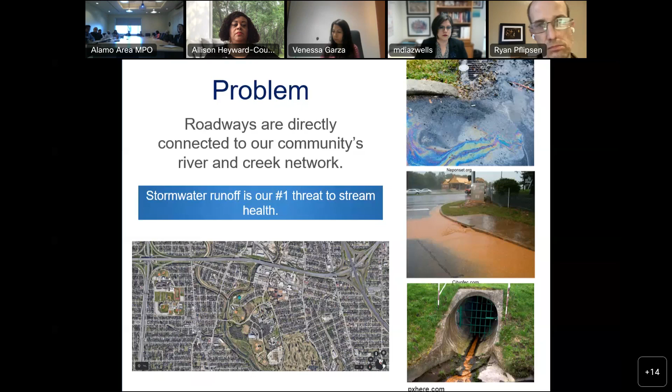And then you see an outfall, a sample outfall. A lot of our outfalls have been designed to be under the top level of the stream or river for aesthetic purposes, but they're there. Whatever is on the street, whatever gets picked up along the street, whatever comes off rooftops—we're right below an overpass on 35, and we've done monitoring here. There's an extremely high amount of bacteria coming off our roof. So we have two big cisterns and a rain garden on the other side of the building, managing our stormwater runoff so it's slowed down, cleaned up, and sent cleaner and, most of the time, cooler to the river. Next one.

There are several pollutants affiliated with stormwater runoff: oil and grease, PAHs which come off of vehicles, and there are other sources as well. Bacteria, as I've mentioned, and metals, with aluminum being a significant material used in vehicles from top to bottom. The structure of vehicles, the tires, even the paint has aluminum. So that's a major source.

Sediment, like I mentioned, sedimentation is a major transport of pollutants from the ground to rivers and creeks. Temperature—on a day like today it's fairly pleasant outside, but the majority of the time in San Antonio we have hot, sunny days. The asphalt and sidewalks collect the heat, and then if it rains, there is a transport of that heat, thermal pollution, into the rivers, creeks, and streams. Both the sedimentation and the temperature cause fish kills.

And then we don't have to worry about this so much here, but road salts—we do on occasion see materials placed on our roads when it's going to be bad. Next slide, please.

These three graphs illustrate the relationship between flow, shown in blue, and concentrations of certain pollutants on Salado Creek. The top one shows a rain event between February 11th and 13th, I think this was in 2021, and it shows E. coli, bacteria. You see that prior to February 11th, both the flow and the bacteria are relatively low, and then when one spikes, so does the other, followed by a leveling off.

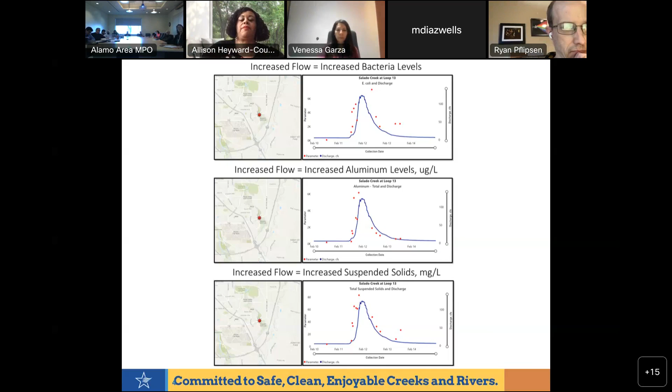So what do we do about that? Well, the first time the River Authority did a test was back in 2004, and we learned that in our southern basin, except in rain events and for about 72 hours afterwards, our basin's water bodies were for the most part within state standards. I had people say we can't control the rain, and I didn't think that was quite an appropriate response. So I just kept looking for and listening for opportunities to find a solution.

Fast forward to 2010, there was an opportunity to do research about what other communities were doing to make their watersheds and/or agencies more sustainable. Low impact development, or green infrastructure, was one of about 12 or 13 different options we researched, and it's the one that rose to the top—one we got authorization from our board of directors at that time to start pushing forward.

So green infrastructure is a set of design tools. It mitigates stormwater runoff, it mitigates street level flooding, and it provides multiple benefits, including improving community health. Traditional infrastructure manages for flooding—the curbs are set to be a certain size, a certain length, and engineers look at how many curb cuts there are and make calculations about how much flooding can be accommodated by roadways, mitigating for that. What's lacking in traditional infrastructure is that water quality piece—it's the multi-benefit piece you get from green infrastructure.

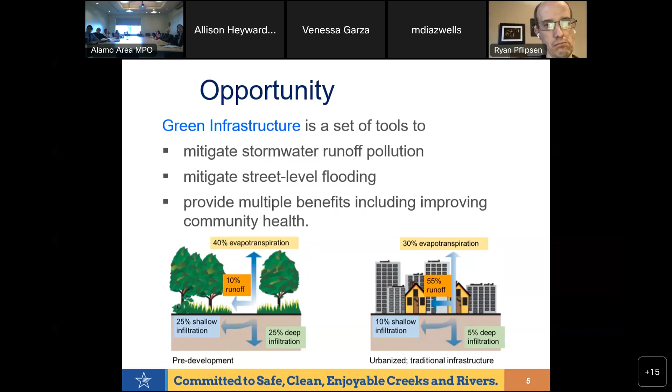So how or where within the ground does green infrastructure remove pollutants? Well, in the non-disturbed areas, there's plenty of soils and plenty of native grasses with deep roots to mitigate. In an urban area, we can put in green infrastructure, and at the surface level where you have UV and mulch, you get mitigation for pathogens, which is your bacteria, oils and greases. For the pathogens, it's in part UV.

Then you go down about a foot and you get mitigation for metals and total suspended solids. Go down 2 feet and you get more pathogen mitigation, the further breakdown of any bacteria not addressed by UV at the surface. And phosphorus and nitrogen, both of those are in chemicals that people put on their yards, on their trees, etc. So it takes 2 to 3 feet for those to start.

And then that thermal load I was talking about, on a 100-degree day, on an 80-degree day, with the sun blasting on hot asphalt, it takes going down 4 feet of dirt, of soil, for that heat to be dissipated, and for there not to be a remaining thermal pollution threat to the critters and the rivers, creeks, and streams.

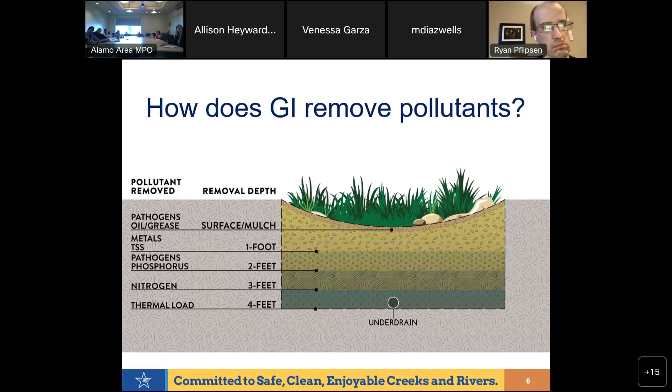All right, next one. So this is just an example on the left-hand side of a traditional roadway and parking lot where you have grates or inlets and underground pipes. The grates or inlets feed the pipe network, and from there the stormwater runoff travels with every pollutant it's picked up on that surface, including from a planted area that's been elevated and completely cut off from the potential water source of stormwater runoff. If it's been treated with chemicals, because it's having difficulties from being cut off from its water supply, because it's been mounded, even those chemicals get sent by that pipe to the closest river, creek, or stream.

And then on your right-hand side, you show how with the depression, with ribbon curbs instead of curbs, with curb cuts, with layers of soil, you get more mitigation of the pollutants.

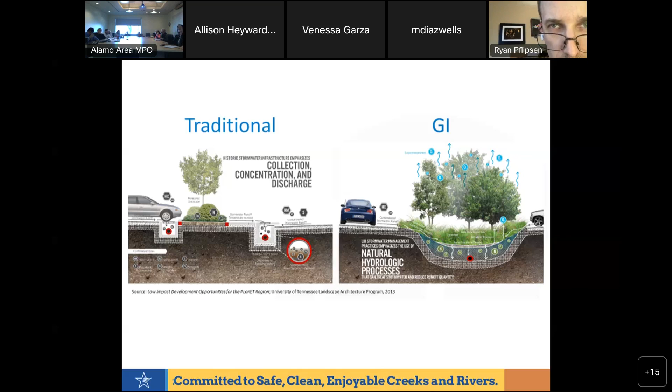All right, next slide. This is just another example, primarily for those of you who have never heard of green infrastructure before. Green infrastructure imitates the natural flow of water, uses the soils and vegetation. It slows the water flow, sinks it, spreads it. With the slowing, you get less erosion downstream, which is always something you're trying to prevent. And importantly, it treats rainwater as a resource rather than stormwater as a nuisance, a flooding and polluting element that your community has to deal with. And it complements grey infrastructure.

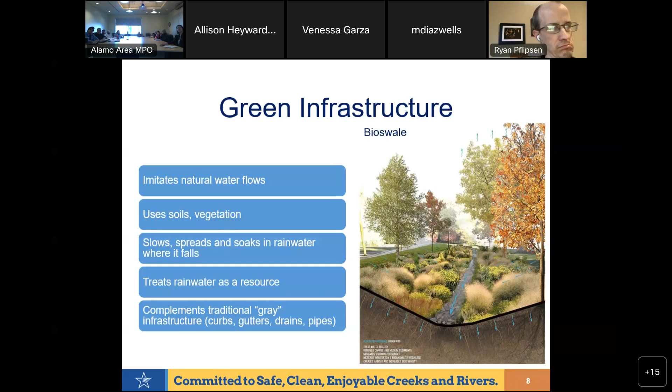All right, next. So we do have at the River Authority an extensive list of green infrastructure recommendations. This is a slide I've been sharing with the SA Tomorrow planning groups this year for phase 3 planning, for those of you familiar with the SA Tomorrow planning process. And Green Streets is at the top of the list, also tied to that 2015 Unified Development Code amendment that we got passed.

If you cannot treat everything on your site to get your points and incentives, the priority is to treat your parking lots and your roadways. That's the priority, because that's where the majority of pollutants are coming from. So it's at the top of our list too.

And so here you see an example in San Antonio of a green street. You're getting mitigation of the pollutants because there's ponding in the depression. That inlet has an elevated lip around it, so you get a slowing down with ponding and a settling of pollutants before there would be overflow later in the storm event, beyond the first flush, where all the nastiest pollutants come off.

You see there are native plants. Native plants have much longer root systems than non-native turf grasses, so you're getting the benefit of those plants in that regard. Plus, some of them are pollinators. You get the aesthetics, and you get the sidewalk.

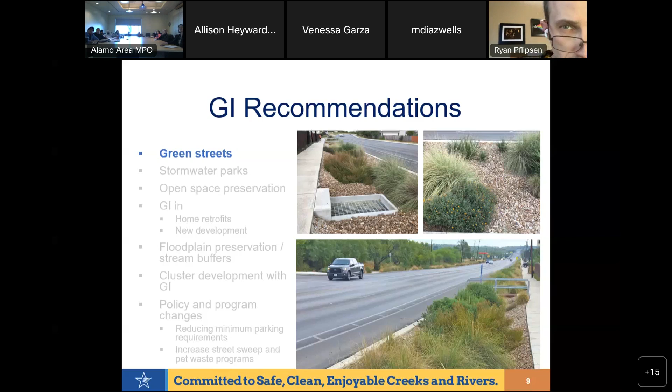I've already started mentioning the multi-benefits. I won't belabor it, but if you have more plants and more trees, you get air pollution reduction, a healthier environment, and so on. Some of these features are relatively low and small, and some can be much larger with a lot more plants. But just as it's taken decades of accumulating impervious cover and additional roadways to cause all this pollution, it's going to take years of adding green infrastructure to fully mitigate it.

So this little BMP—do I expect it to clean up the San Antonio River by itself? No. But get multiple of these strategically placed through the community, and you can start to see an impact on the rivers, creeks, and streams.

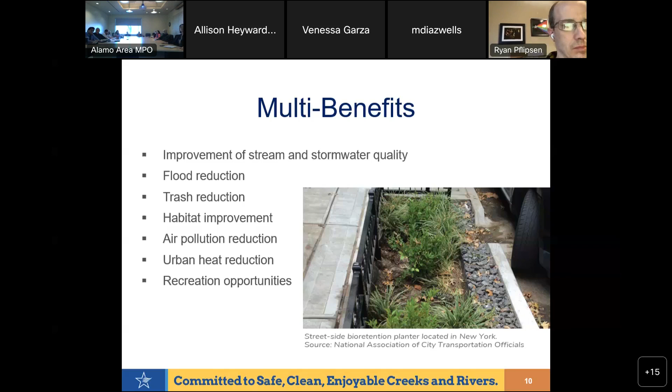Here's another opportunity, which gives yet another benefit. This is called a bump out, also called a chicane, and they can be traffic calming devices. You have a wide road, sort of a boulevard type road, known for encouraging speeding. You can treat stormwater with the bump out and the engineered layers, but you also visually narrow the road, and that psychologically propels people to slow their speeds. It also introduces greenery and aesthetics.

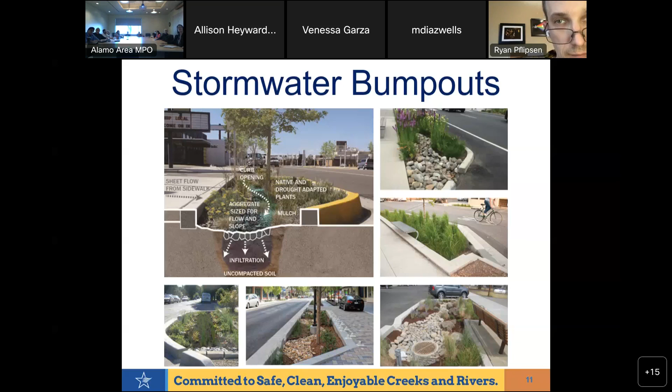So I've been talking a lot about more naturalized BMPs, and now I'm going to start talking about some that are more proprietary. They're more engineered—you can purchase them and have them tailored to your spot or just dropped in.

One is permeable pavement, and it's not just laying bricks on clay with spaces between them. If you've got clay, you're going to need sub layers—engineered soils or soils brought in. There's also a storage layer for flood mitigation, and then a choke layer that allows the water to either go to the storm drain or protect your neighboring building and other infrastructure.

Then in the middle, you see your street side tree well. The trees are in a concrete box, and the water goes in like it would a normal storm drain, but it goes into that concrete box where there's an opportunity for settling out before the runoff continues into the storm drain network. And on the far right, you have a vegetated filter strip.

You're sending water across a ribbon curb or through a curb cut instead of a long solid curb, into a storage area where there can be slow release, and then for any overage because of a larger storm, sending it across a grassy swale before it gets to the storm network.

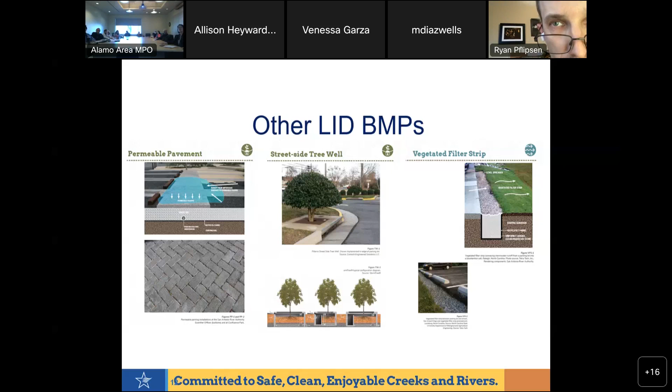Getting super, super proprietary and engineered, you have things like high flow medias that are on the market now, designed to push many cubic feet per second through the soil—more than you can with natural soils—and hydrodynamic separators that spin and send the sediments and pollutants into one chamber. You can buy them so that larger trash gets sent to yet another chamber, and the stormwater that's been cleaned up gets sent onto the storm drain.

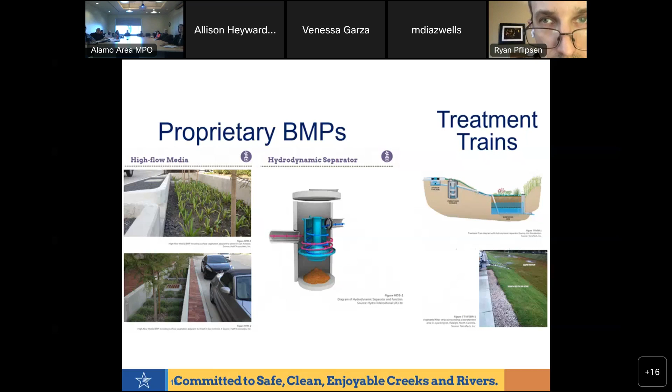You can pair these best practices, two or three stacked in a train, to get even more mitigation depending upon your site configuration, your right of way, and how much room you have.

Now I wanted to show you some schematics that we created at the River Authority. This is either Roosevelt or VFW, reimagined crossing the San Antonio River just south of town. If you went toward the top right of the screen, there would be a river bridge going over the river, a vehicular bridge. But what we've done...

...swales with the curb cuts—you can sort of see the little curb cuts there. We've added trees, we've added seating, we've added bike lanes and the ability to make a left-hand turn on the bikes across opposing traffic, along with aesthetics, shade, and cooling. Again, that multi-benefit concept.

Similar here, we've got a center block crosswalk with the bioswale, which is a type of green infrastructure, low impact development. So you've got curb cuts that let the stormwater in, let it settle, slow down, clean up, and cool down. It's either connected to your storm network underground through the storm drain system, or there's an outlet, depending upon what it's sized for and the kind of soils. And you see we have the bike lanes as well.

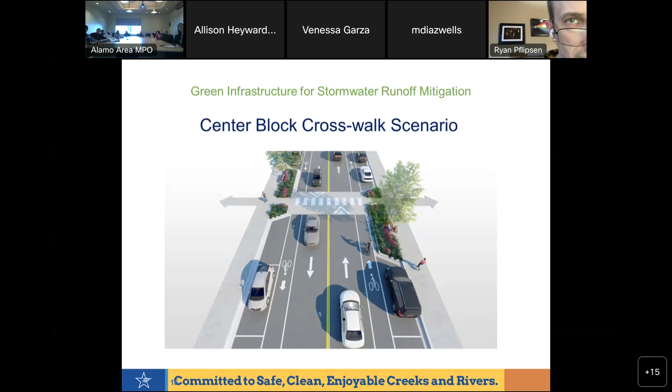And I think that's it. So this is just a highlight of what green infrastructure, what its role can be in the mitigation of stormwater pollutants. We have a number of different presentations. This has touched upon several different topics very quickly, just to whet your appetite and see what the ATAC's tolerance level is for perhaps more information on this, and whether this committee would be interested in looking into encouraging MPO to incorporate points for low impact development, green infrastructure, if it's going to be included in future roadway projects, so that as a sustainability feature, green infrastructure, river, creek, and stream health, and the other benefits are included.

I think at this point, stormwater is not a component. Stormwater protection, river protection is not a component. For the scoring process you're asking about? For any of your scoring mechanisms or decision matrices or anything along those lines.

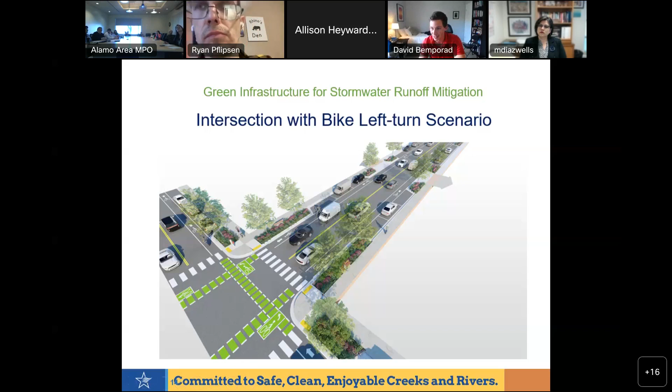Yeah, Robert, Karen, I've got a couple of questions, and you and I have talked about this multiple times. But I wanted to thank you again for the updated renderings. I really love seeing the bus and bike lanes going behind it - that's really exciting. One thing I love about that rendering, and the one right before it, is showing the bioswale separating car traffic from bike traffic. Incorporating that into more would be really great. That's just a comment.

My first question for you, Karen, is something we've run into in multiple cities in the San Antonio region - engineers worried about safety and liability, that ribbon curbs or these consistent curb cuts to allow water flow aren't as structurally sound, and that they'll be more damaged or impacted by car traffic or use. Do you have strategies, or experience convincing engineers with data that this is in fact every bit as safe and totally acceptable?

There is a national standard for how to design green infrastructure for roadways. When we've been locally challenged - either about too much water underground impacting sidewalk stability or what have you - we've gone to that federal standard, provided that information, and the road project moves forward as we've hoped. There are a lot of case studies and pilot projects out there that have been in the ground for a long time. That's actually a new one for me, David, that curb cuts would cause the structural integrity of the road to be weaker.

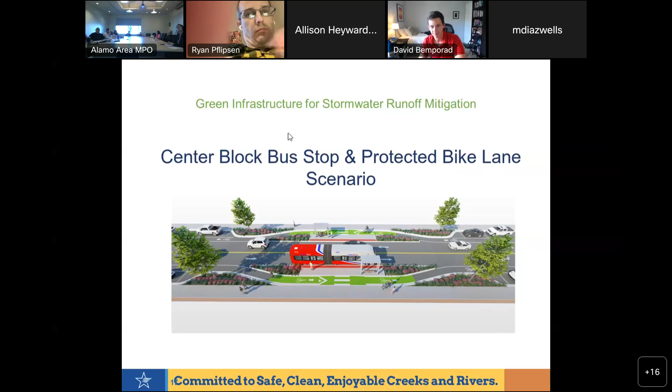Anybody else online that has a comment or question on Karen's presentation? This is Michael Sharp with City of Seguin. Can you hear me okay? Yes, Mike. Okay, I'm going to go back to one topic about the structural integrity of the roadway.

I think where the concern lies is that water in the bioswale has a chance to migrate not to the storm drain that lets it out into its ultimate watershed, but under the road structure, which then over time could weaken the subgrade and weaken the pavement structure. So I'm a big proponent of bioswales and of green design because I think it reduces heat island effect and provides a benefit to the residents in the community in terms of additional shade and a more enjoyable experience in your downtown environment. But what I think you have to do to placate the engineer who's worried about the structural reliability of the roadway is build something into the design of this bioswale that prevents that migration.

It has to be some sort of impermeable barrier. Then the concern is that the water gets out of that basin so it doesn't become anaerobic. There are regions in this nation that use very similar ways to approach this same challenge, and I think the San Antonio River Basin LID Manual has a couple or three different options: fabric, plates, et cetera. So yes, I think that would alleviate concerns, depending.

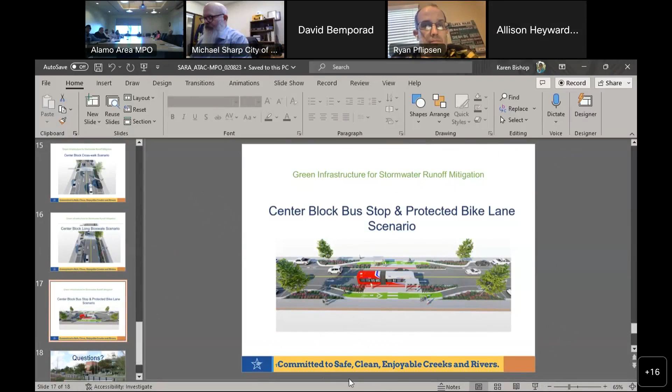Back when we were just getting ATAC formed, Robert was elected in March 2022. We've had a couple of different co-chairs for the cycling and micromobility co-chair position. Recently, JD Simpson was the most recent co-chair, and she changed positions at her organization, SAV Cycle, so she is not on ATAC anymore.

That's how this position opened up as of December 2022. So we're talking today about this opening for the co-chair position representing the bicycling and or micromobility community. At this time, we're looking for nominations from the committee. You can either nominate yourself or possibly nominate another co-chair member or another ATAC member to fill the remainder of the unexpired co-chair term, which is until March 2024, representing the cycling and or micromobility community.

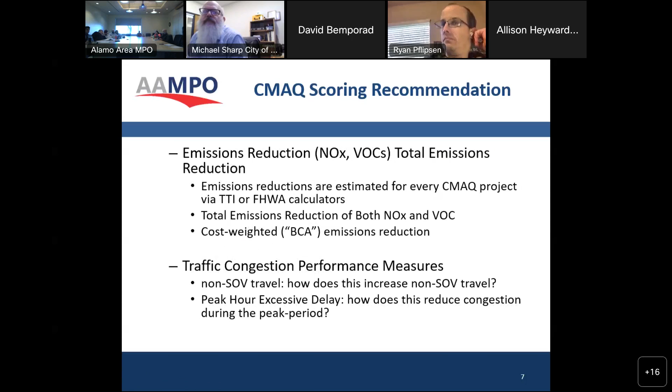So SOV is the industry term for single occupant vehicle, basically driving alone. So if we're able to carpool, it offsets a lot of emissions by being able to ride the bus, carpool, or ride your bike, or walk.

Thanks, Joey. So my initial recommendation is that— originally in the last project call we just did straight emissions reductions, 50-50 total emissions and cost weighted. I'm proposing that we do the same methodology, but with 70% of the points allocated to emissions reductions, with the majority of that being total emissions reduced. I'd push for like 55% in total, but we can do a 50-50 split of that too. Traffic congestion will reserve 30% of the points for those traffic congestion measures, and I think we should split them equally. So that will be a new scoring criteria for the project call.

Again, these CMAQ performance measures are required by the BIL to be used in our project selection and programming process. So are there any questions on the CMAQ project call or the scoring proposal? Any questions online? Okay, all right, so I'm going to pass it off to Joey and he'll give a similar explanation of what we're proposing for TA scoring.

All right, so good afternoon once again. So to mention, TA is short for transportation alternatives. And as Clifton mentioned earlier, this is focused on bike pedestrian projects.

Something different we're proposing for this year: when we took a look at scoring past years, we just had one scoring sheet for all TA project types. That includes projects that were on street and even projects that were off street, like local or regional trails. So one thing we're also looking at is, depending on the roadway classification, how we're integrating the FHWA, the Federal Highways Administration proven safety countermeasures, and how to consider those for possibly an increase or decrease in the project score.

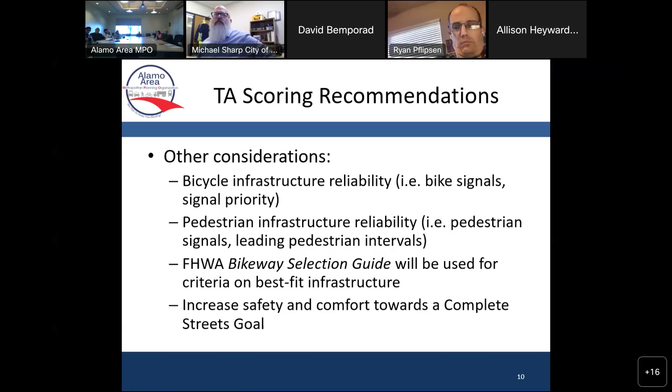So essentially, if you take a scoring sheet for a project that comes through, we'll look at how it addresses safety and comfort, how it services high activity generators, congestion reduction, how it improves system connectivity and reduction of barriers, and how it addresses access for EJ populations—EJ referring to environmental justice populations. I'll talk more about what these scoring categories mean in the coming slides.

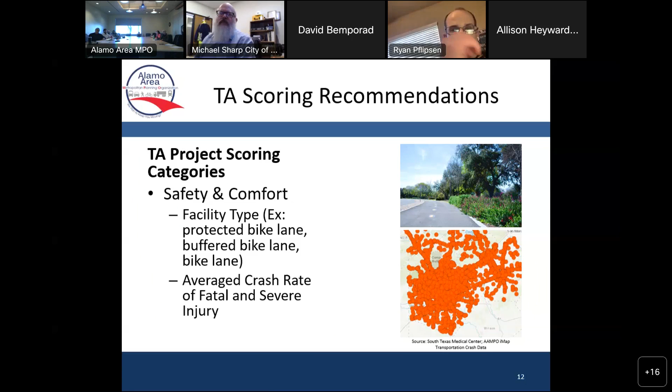The next category is service of high activity generators and congestion reduction—essentially, what is this infrastructure servicing in the area, and how widely will it be used? In many cases, maybe there's existing infrastructure being upgraded to make it safer and more comfortable, or there are schools on the corridor, churches, apartment complexes, or a bus stop or transfer station nearby.

So we're thinking of those kinds of considerations, and essentially scaling down from there in terms of the most uses it serves versus more minimal uses it serves.

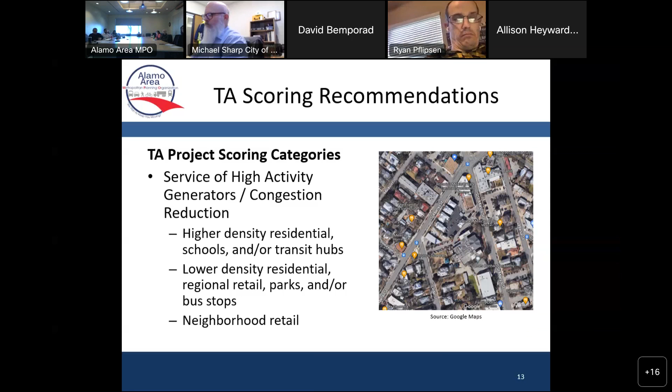The next is improving system connectivity and reducing barriers in infrastructure. This means making connections or upgrades to existing infrastructure, like connecting bike lanes to each other where some parts are already implemented. So this entity might be looking at adding to bicycle network coverage or upgrading existing bicycle infrastructure, and similarly adding to or upgrading existing sidewalk networks. Of course, we also take into consideration whether these proposed upgrades or new projects are included in an existing plan, whether it's an MPO plan or your local city, county, or state district plan.

The next one is focusing on addressing access for EJ populations, meaning environmental justice populations. So is this project connected to minority and/or low income environmental justice areas? If you're not familiar, environmental justice is a federally designated term we track a lot at the MPO, and we have information about this on our website and on our maps. This is a focus we have to address at the MPO, making sure we're improving access to where it should be for many of these communities.

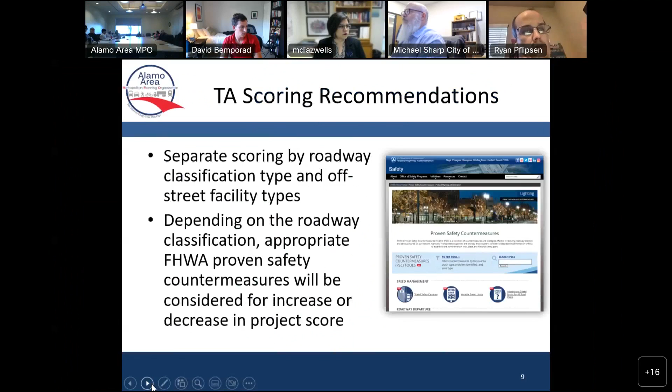So in the past, under safety and comfort, facility type was one criteria, and what I've instructed Joey to do, and what we're going to work with the work group on, is develop a matrix of facility types and roadway types—or off-road, such as a bike path—and what type of bike facility is most appropriate for that.

So if you're applying for a bike facility along a principal arterial, you'll get more points for something like a cycle track or a curb-separated bike lane, but a lot less points if it's just a sharrow or a painted bike lane with no separation. And as you go down to minor arterial or collector, you'll get a bit more points for those lighter solutions when it comes to context-sensitive design.

So we're really just trying to figure out a way to build that out a little more, because in the past we just listed things like bike lane and six-foot sidewalks, but we're going to add another dimension with the type of facility the bike improvement is built upon. Off-street facilities will still have safety factors, but they'll be a little different than projects that are on street.

So does that make sense to you, David?

Yeah. Yes, thank you. I want to flag that Carl has his hand raised, in case y'all can't see it. Okay.

I just lowered it. I think Clifton cleared up, but I wanted to go back to the slide and address your point, because the way I had read it was that safety and comfort will be more of a factor for major arterials. So the bike lane situation you're describing, the striped bike lane, isn't going to get a lot of points.